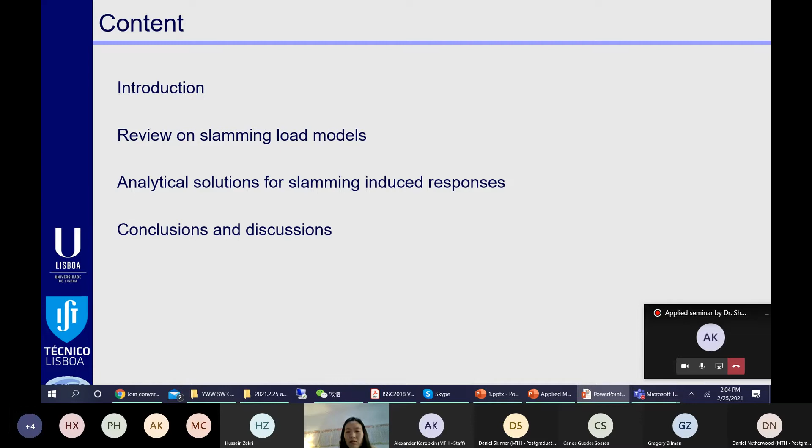The wave impact caused by slamming can be roughly divided into 4 types. This is the bottom slamming—it happens when the ship emerges and re-enters the water surface. This is the bow flare slamming—it occurs due to high relative speed of the bow flare to the water surface.

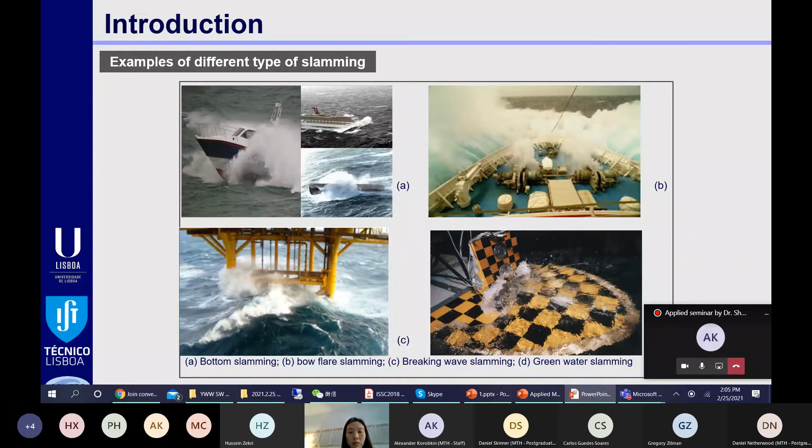This is the breaking wave impact for offshore structures. The breaking wave impact happens also for ships, and it is generated by the superposition of the incident waves and bound wave hitting the bow of a flat ship, even for very small ship motions. The last is green water impact. So in our study, we have focused on the bottom slamming and bow flare slamming.

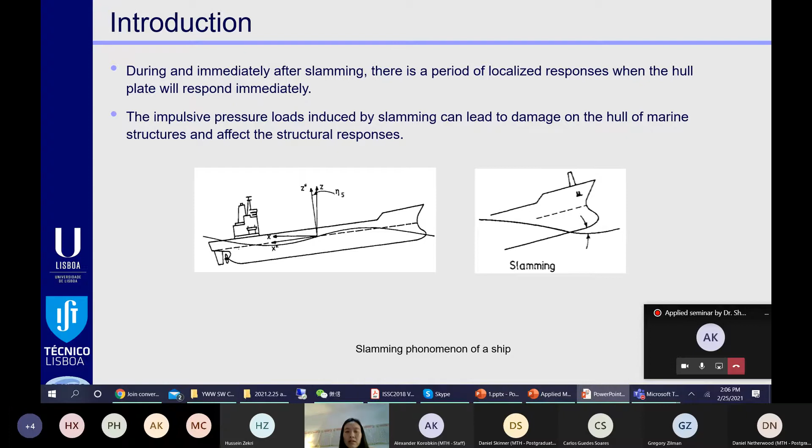When a ship is advancing in rough seas, the ship hull may impact with the wave surface due to very large vertical motions. During and immediately after the slamming, there is a period of localized responses when the hull plate will respond immediately. The impulsive pressure load induced by slamming can lead to damage on the hull of marine structures and affect the structure response globally.

Slamming also introduces whipping response. The whipping response refers to the hull girder vibration due to slamming. Local slamming is also likely to happen on the wet deck connecting two hulls of a catamaran. Looking at these two pictures, we can see we have different geometries on this connecting plate—this is a wedge shape plate, and here is a very flat plate with very high...

Shan, excuse me, on your slide, in the right bottom corner, there is the—yeah, just close it, click on the cross. Yes, perfect, thank you very much.

Thank you. So look at these two pictures—we can see this is the wedge type geometry, and this is a relatively flat plate. For the flat plate, when the ship is advancing at very high speed, the impact between the plate and the wave will induce very high slamming pressure, which will cause damage owing to even one single impact.

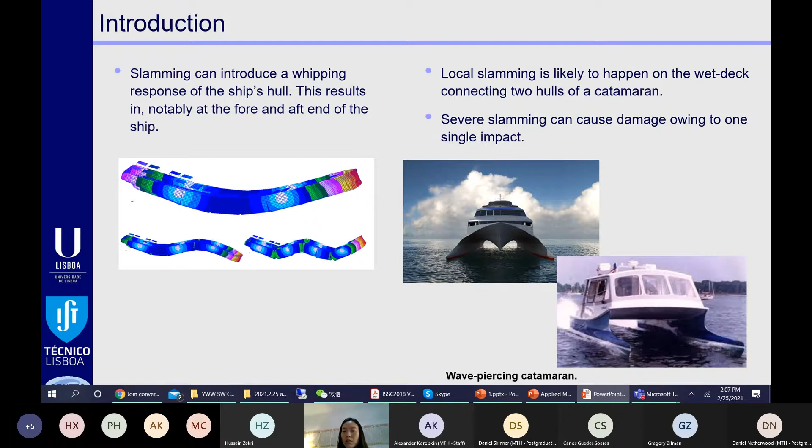The wave load response of a ship in harsh or extreme irregular waves and the structural safety is a special reason of concern, since ships operate in unknown, severe, and high-risk environments. Marine accidents due to structural failure may occur at sea.

There are some examples. The first example is the 275 meters long container ship, which was caught in stormy waves. This example is for a 5-year-old container ship, which was broken into 2 segments in very severe weather.

There are also some examples of local ship damage due to wave impact. For example, here is the Estonia ferry disaster. The disaster killed more than 800 people because the bow of the ship broke and the ship sank.

Here is an example for FPSO—it is a floating production, storage, and offloading system. In the picture, we can see there is a very big permanent deformation due to repeatedly water impact on this location.

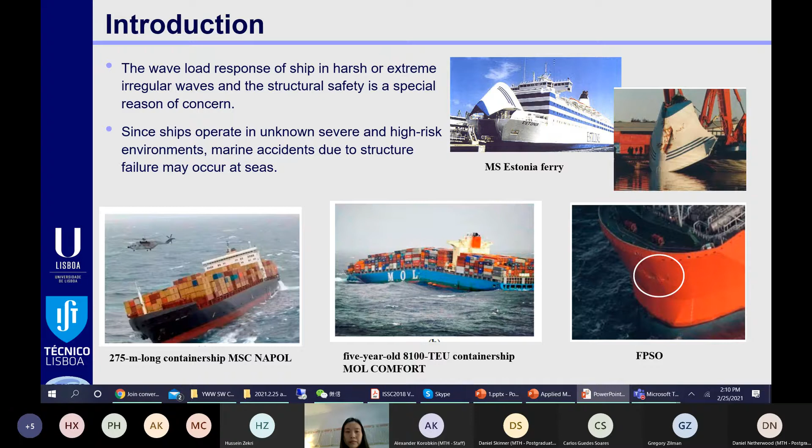The common hydroelastic models for ship slamming commonly involve 3 models: the structure model of the ship, a hydrodynamic model of the fluid, and a coupling method to enable the interaction between fluid and structure. The structure model is usually represented by a beam model or 3-dimensional finite element model, while for the coupling method, the modal approach is the most common method.

For some cases, in-house developed or open source coupling interfaces have been developed to couple CFD solvers with 3-dimensional finite element models. For the hydrodynamic model of the fluid, there are 2 approaches: the potential flow-based solution and CFD tools. For the potential flow-based solution, there are usually 2 approaches: the strip theory approach or the boundary element method. Theoretically, the coupled CFD solver with a 3-dimensional finite element model can simulate any situation of the fluid and can study most of the physical aspects of ship slamming.

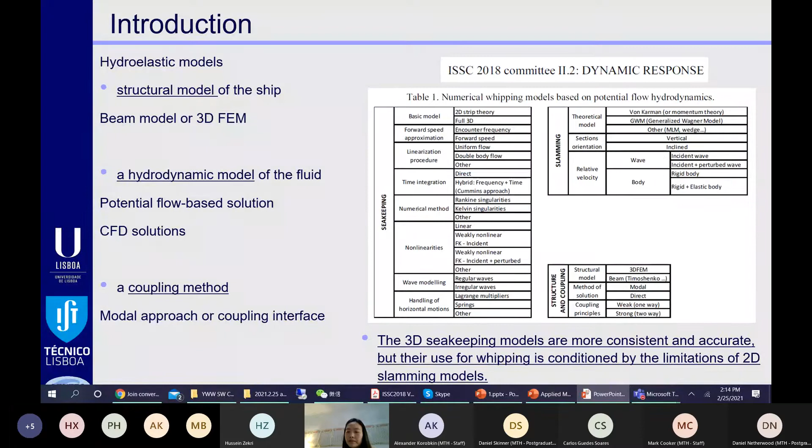Next, I would like to review the slamming analytical models and introduce their applications in my study. For this topic, a two-dimensional wedge impacting with water was initially studied by Von Karman in 1929. This model neglected the wave surface elevation on this part. Later, Wagner developed this model by taking this into consideration.

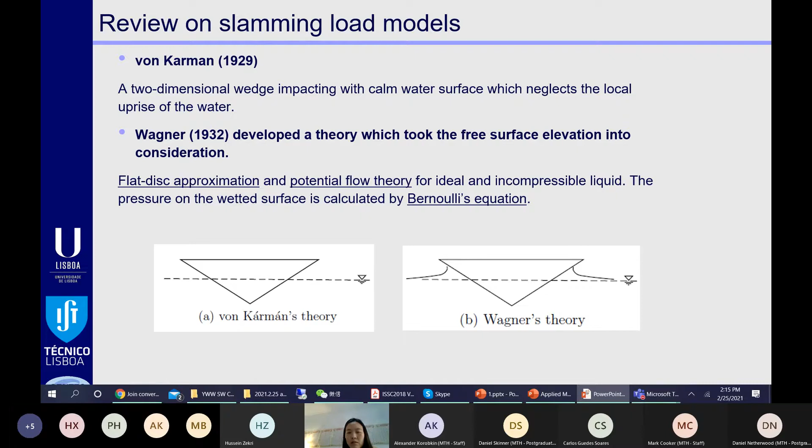Both models are based on the flat disk approximation and the potential flow theory for ideal and incompressible liquid. The pressure on the wetted surface is calculated using Bernoulli's equation. After the initial studies, a lot of work has been done by other researchers to make improvements.

In 2004, Professor Korobkin studied these models based on potential flow theory. The hydrodynamic pressure in the flow domain is given by the Cauchy-Lagrange integral. Here are the expressions for the hydrodynamic pressure and the velocity potential. H means the penetration depth of the body into water, while F means the body shape.

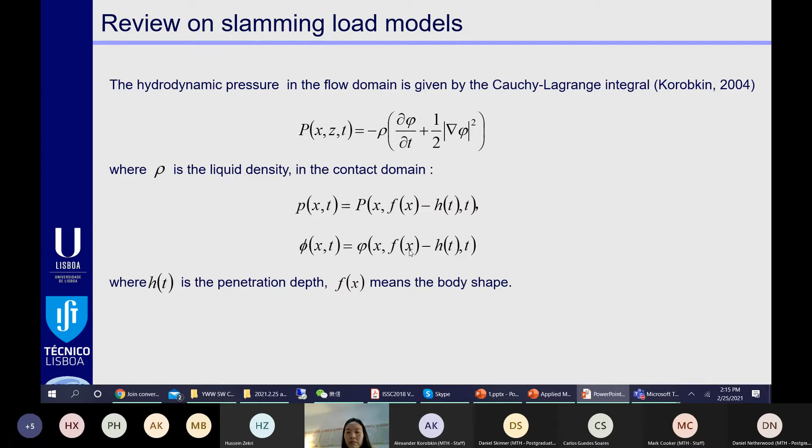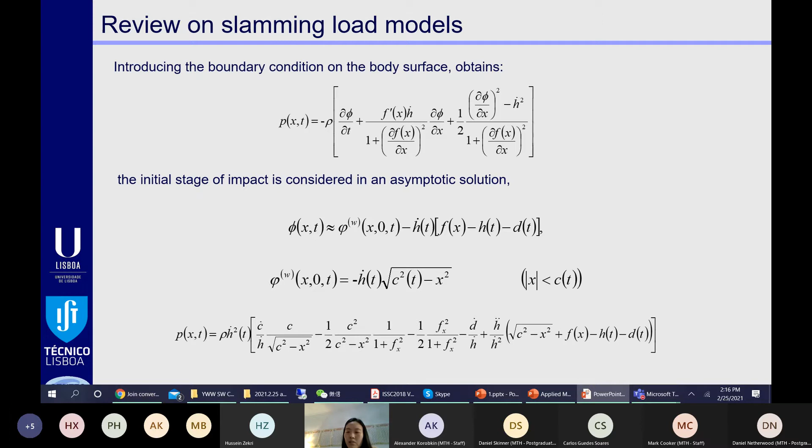If we introduce the boundary condition on the body surface, we get this expression for the pressure. Considering only the initial stage of the impact, we get an asymptotic solution for the velocity potential. By introducing this expression into the pressure formula, we can get this format of the pressure distribution, depending on space and time. In this equation, the function d was introduced to include the effect of the splash height of the water. With different assumptions of the function, we get different analytical models.

To improve the predictions, the higher order terms in the Bernoulli equation were taken into account within the generalized Wagner model and Logvinovich models. The results of Professor Korobkin showed that the Logvinovich model corresponds better to the experimental data than the generalized Wagner model. These models can be extended to different shapes of structures and also to three-dimensional bodies. These models, along with the original Wagner model, have been applied in one study to examine the local response of a sample structure due to water impact.

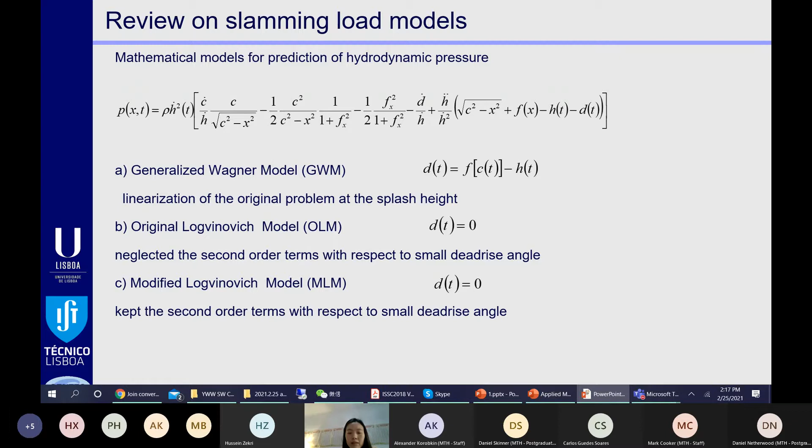Next, we're going to see 5 examples of the application. The first example is the hydroelastic response of the wet deck slamming.

The wet deck means the structure part connecting two hulls of a catamaran. Because of the flat geometry, which we have seen in the picture at the beginning of the presentation, very high slamming pressure can be generated.

For the part of the wet deck between two transverse stiffeners, an Euler beam with length L corresponding to the distance between the two stiffeners can be a good approximation. The hydrodynamic pressure on the bottom is estimated using the Wagner model. The deflections of the plate at each time step were considered in the slamming load model, which means this solution is a fully coupled hydroelastic model.

The second one is the dynamic response of an elastic wedge subjected to slamming load. We also use a beam model, but here we applied the rigid body assumption when predicting the slamming load, and the modified Logvinovich model was applied. This case considers the water impact between the front part of a slender ship with a width much smaller than its length.

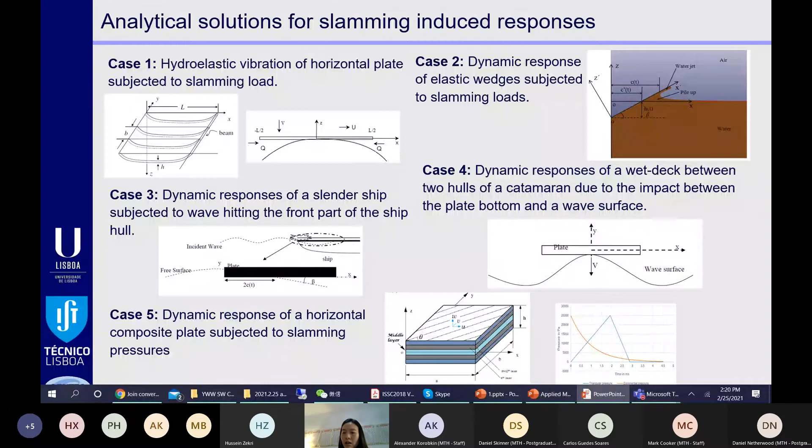Next, we are going to review this case briefly. In the first case, an asymptotic solution proposed by Professor Faltinsen was applied. We consider the speed of the ship U and also the compression force acting on the plate due to the connecting members on the hull.

By considering these 2 parameters, we have this equation of motion for the hydroelastic analysis of the beam, where EI is the bending stiffness per unit length, and Q is the longitudinal compression force per unit width. M is the mass of the plate per unit square.

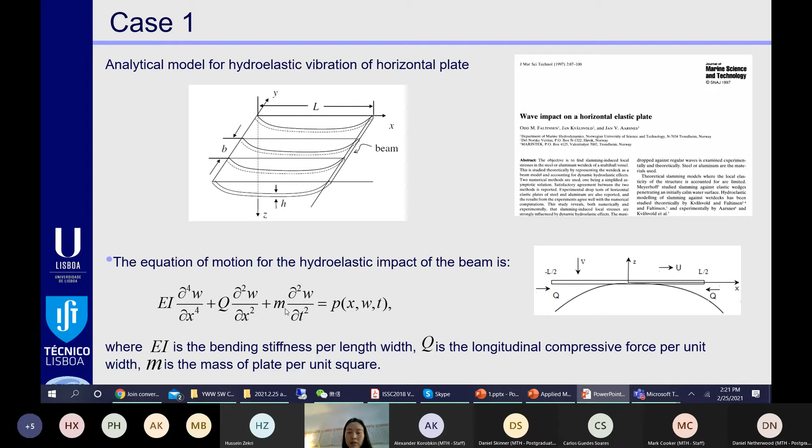The elastic deflection is first expressed in terms of the normal modes using this equation, where AN means the principal coordinates and psi are the eigenfunctions. By considering the symmetric beam, we have this type as the solution of the eigenfunctions.

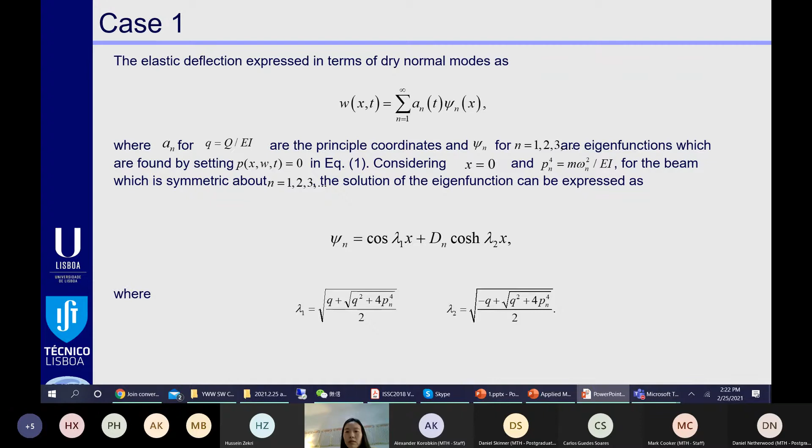Considering the speed of the ship, we get this type of velocity potential on the body, which was proposed by Professor Faltinsen, where phi3 means the velocity potential due to forced heave with unit velocity, given by this formulation, where L is the length of the beam.

Regarding the hydrodynamic pressure P, we considered the effect from the speed of the ship. Then, if we introduce the velocity potential, we can get this type of hydrodynamic pressure.

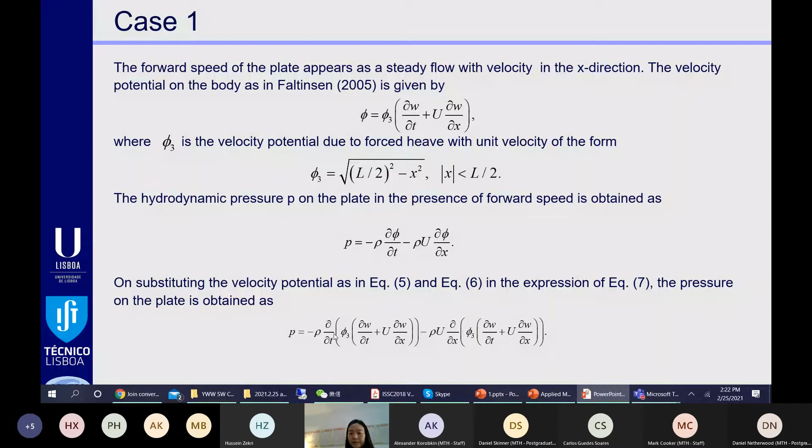Substituting the previous equation into the equation of motion for the beam, we can get this form for the equation of motion. Then, by multiplying the eigenfunctions on both sides and integrating over the wetted surface of the beam, we can get this equation.

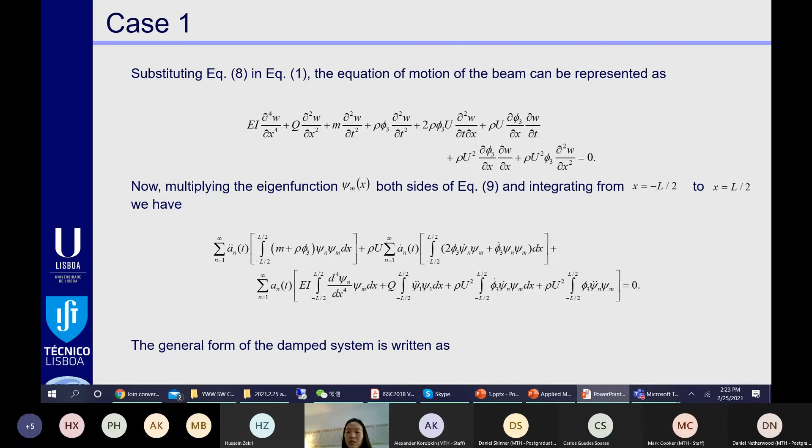The general form of the damped system is written as this, where m is the inertial coefficient, c is the damping coefficient, and k is the stiffness coefficient. These three values of the matrix can be calculated using these equations. If we know the properties, dimensions, and boundary conditions of the system, we can get all the results.

The experimental study carried out by Faltinsen showed that the results associated with the first mode shape dominated the response, so only the first mode was considered in our study.

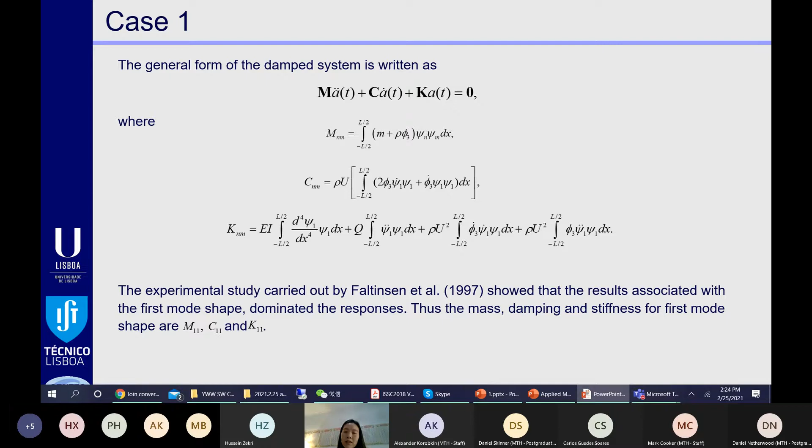The table lists the plate properties and the parameters that we used in the calculation.

To validate the model, we use a fully coupled ALE and finite element method, implemented in the commercial software LS-DYNA. This is a fully coupled hydroelastic analysis, and we compared the predictions of the slamming pressure and also the deflections at the middle point of the beam.

These two figures compare the pressures at two locations of the beam using the asymptotic analytical solution and the software LS-DYNA. We can see that for this case, with a 2.5 meters per second entry velocity, the commercial software provides very high initial peaks. However, we have very low initial values in the analytical prediction.

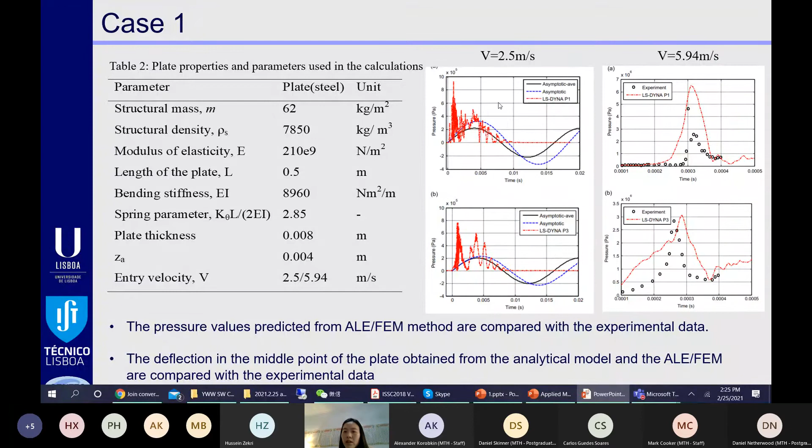Then for another case with a higher entry velocity, LS-DYNA provides better agreement with the experiments. For the same case, we compared the deflections at the middle point, and we can see that even though there are very big differences between the pressure predictions, we get better agreement on the deflection in the first half period.

This result is consistent with the conclusions presented by Dr. Sime Malenica: the peak value of the pressure doesn't affect the deflections on the structure much.

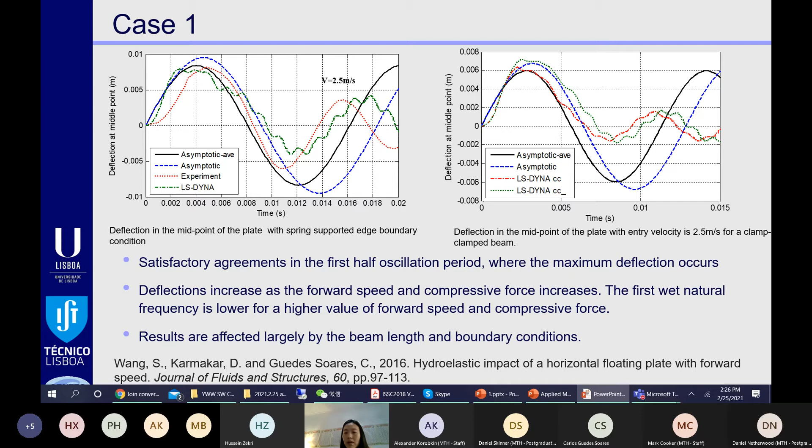For another case with a different boundary condition, the analytical solution also provides satisfactory agreement compared to the fully coupled analysis. There are more results presented in the paper, and results are affected largely by the beam dimensions and the boundary conditions.

The second case is about the impact on the elastic wedge. We use a similar approach, the Euler beam for the wedge and the modal approach to get the deflections on the structure, but we didn't consider the structure deflection effects on the slamming pressure.

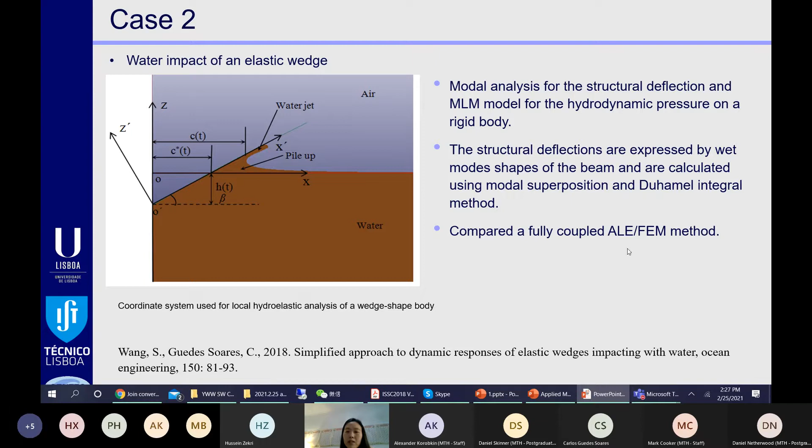So this is a dynamic analysis, different from the previous hydroelastic analysis. Similarly, we compared the results of the deflection at the middle point with the fully coupled analysis.

Assuming the rotational inertia is small, the governing equation of motion for the beam is given by this equation. Similarly, we use the normal mode to present the deflection first, and then we can get a differential equation for determining the principal coordinate An.

In this equation, the right side is the generalized force, where small p is the hydrodynamic pressure, which depends on space and time. We use the modified Logvinovich model for the pressure.

By using the Duhamel integration method, we can derive the response, where An0 is the initial deflection, which is zero, and this is the initial velocity of the plate. We consider this to be the relative velocity between the plate and the wave.

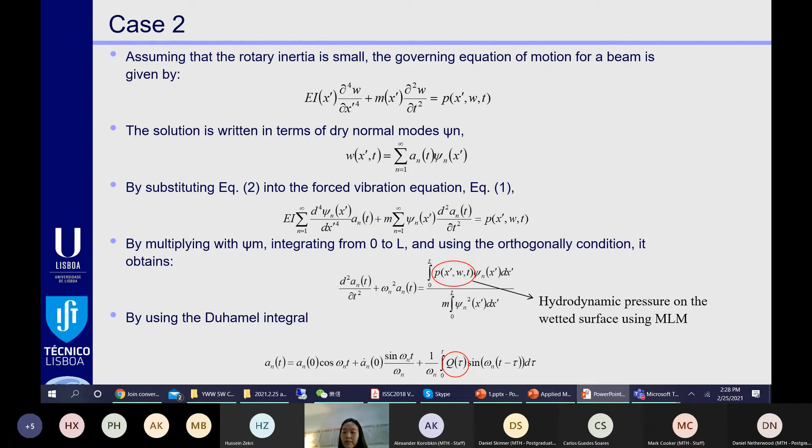To validate the case and identify the hydroelastic effects on the model, we compared the deflections for different cases with different dead rise velocity and plate thickness.

As mentioned before, the analytical model is a dynamic analysis, while the fully coupled ALE and finite element solution is a hydroelastic analysis. So to compare the results predicted from these two solutions, we can investigate the hydroelasticity.

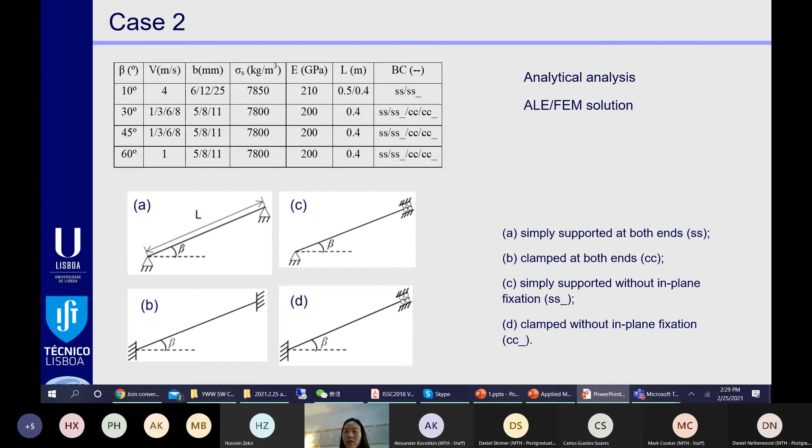Here are the results for the case with 10 degrees dead rise and different plate thicknesses. We can see that for these two cases, when we have low or small plate thickness, the analytical results are very different from the fully coupled analysis, while when we have a large plate thickness, the agreement is much better.

In this study, we applied a ratio RF to represent the hydroelasticity effect. RF means the ratio of the loading period to the dry structure natural period. A value less than 2 indicates that hydroelasticity is important for the case, but if this value is higher than 2, we can consider the hydroelastic effect small.

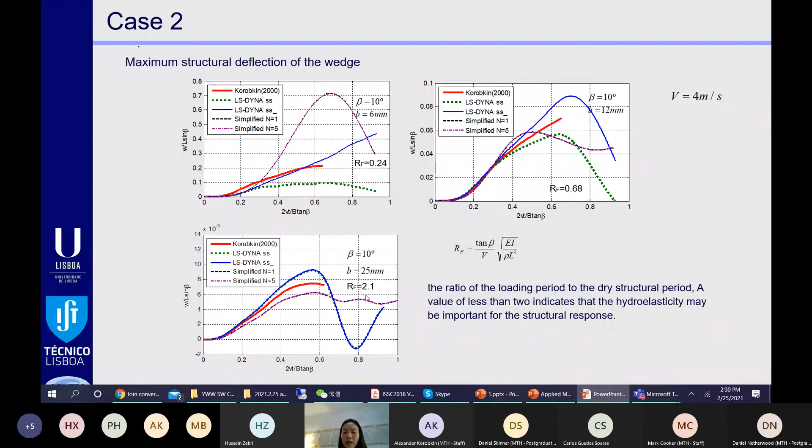Then we can apply the analytical model. This statement was also proposed by Professor Faltinsen, and our results are consistent with this statement, because for these two cases we have very small RF, and here we have a value higher than 2.

In this slide, there are results for the case with larger dead rise, 30 degrees and 45 degrees, when the entry velocity is smaller, 1 meter per second. For these cases, we can see the analytical models provide satisfactory results in the time history of the response at the middle point, compared with the fully coupled ALE and finite element analysis and also a boundary element solution.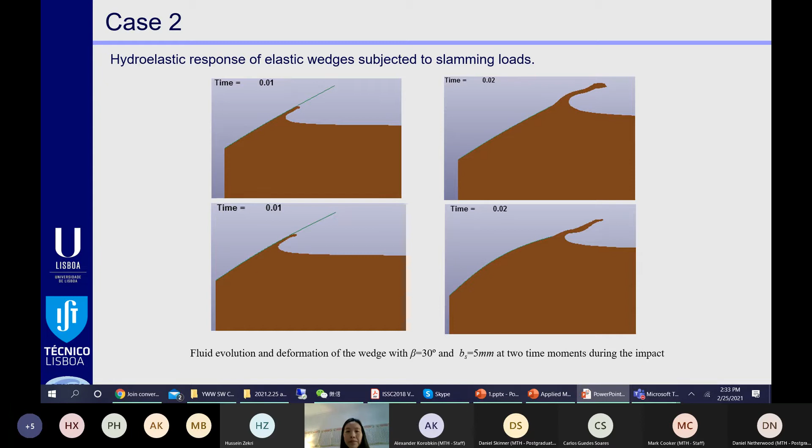To see the differences between the applications of different slamming models, we also applied the generalized Wagner model and the original Wagner model in our simplified analysis, and we compared the deflections from these different slamming models. We can see that with different slamming models, we predict different structural responses. It means that the accuracy of the prediction on structural response is affected by the accuracy of the slamming load.

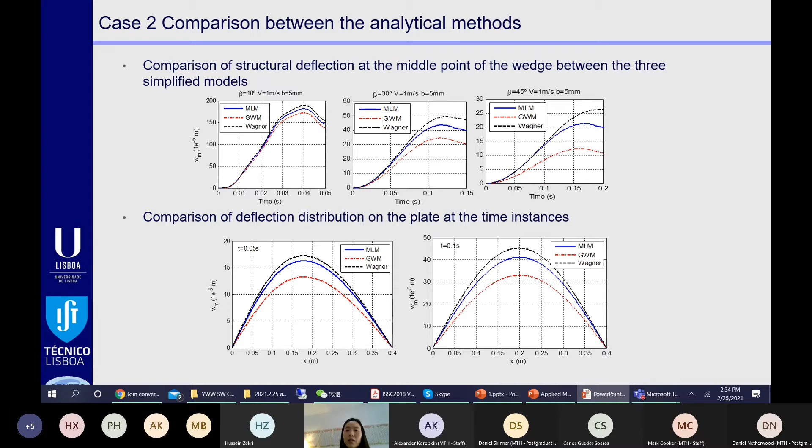The present study indicates that the simplified method gives satisfactory predictions of the deflection on the elastic wedge when the hydroelastic effect is not significant, and it is validated for the cases with larger dead rise, low entry velocity, and high plate thickness. It is also interesting to see the differences between the simplified model and the fully coupled analysis.

So for the simplified method, it is easily derived and solved based on potential flow. The coupled ALE and finite element method is very sensitive to meshes and time step. The numerical uncertainty is due to the discretization, and the experience of the users are also difficult to be identified. But this solver can simulate the compressible and viscous flow. The simplified method can be applied for the wedge with arbitrary dead rise angle and constant velocity.

And of course, it is possible to extend the model to more geometries with different boundary conditions. But the numerical analysis can be used for an arbitrary geometry with arbitrary boundary condition and velocities. However, from the CPU point of view, the difference is very high.

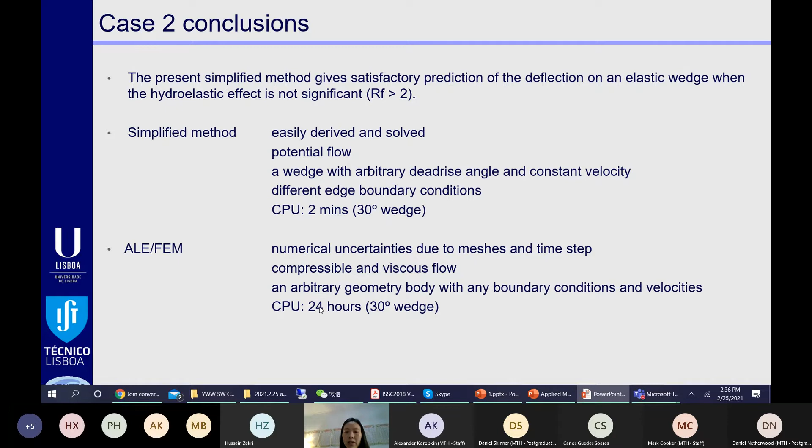The next case is the impacting between a slender ship with a very big wave. And the solution is very similar to the previous one, so I will review the case very fast.

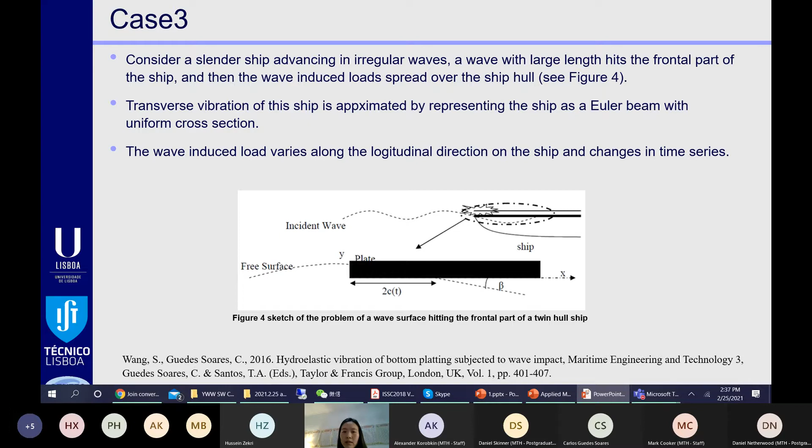Here it is the approximated model for the problem. We consider the ship is an Euler beam, and the beta is the relative angle between the wave surface with the beam. The V is the relative vertical velocity between the structure with the water.

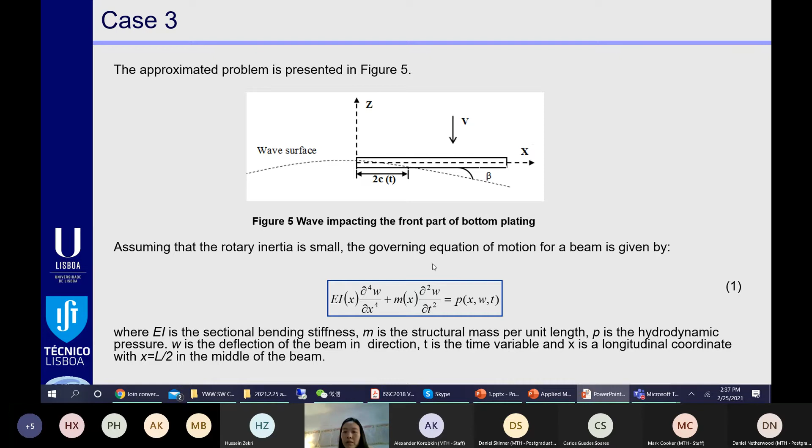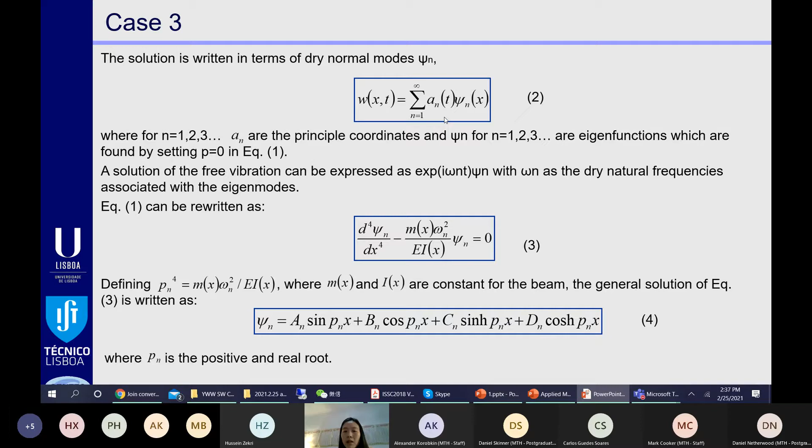So we apply also the Euler beam equation of motion, and then we express the deflections using the normal modes. And finally, we get this equation for determining the principal coordinate. In this equation, this P is also the hydrodynamic pressure on the rigid body.

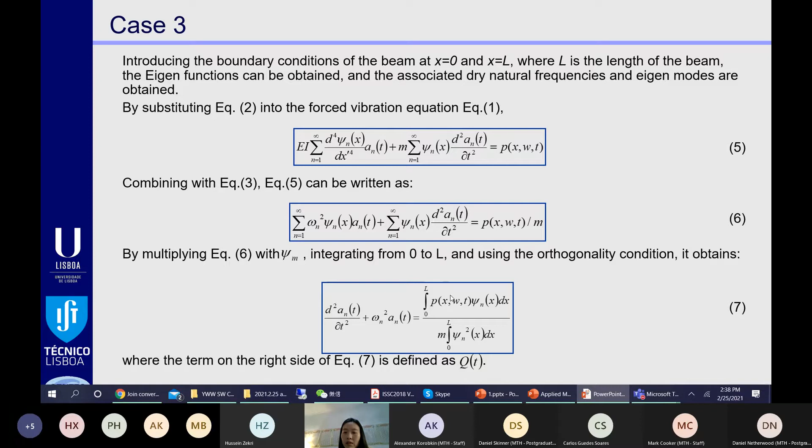It is still the rigid assumption model. We use the Bernoulli equation to derive the hydrodynamic pressure.

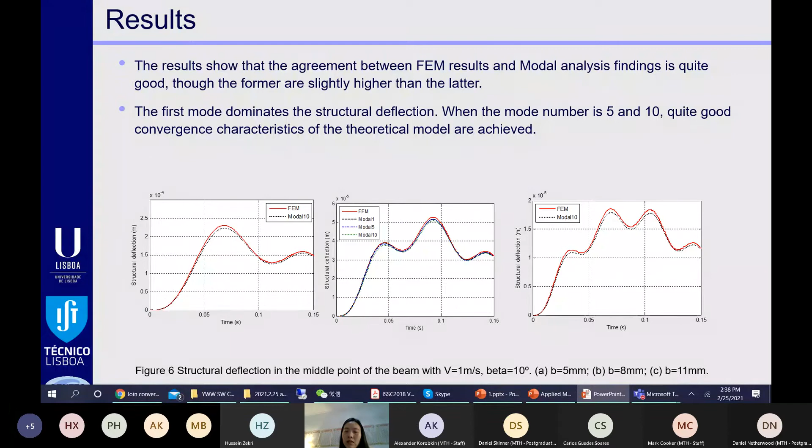The analysis was validated by using the direct finite element analysis in ANSYS, and we consider different number of the normal modes in the analysis. We can see very good agreement was achieved.

There are also different results for the maximum deflections for the beam if we consider different relative angle between the wave with the cylinder shape and also different relative velocities.

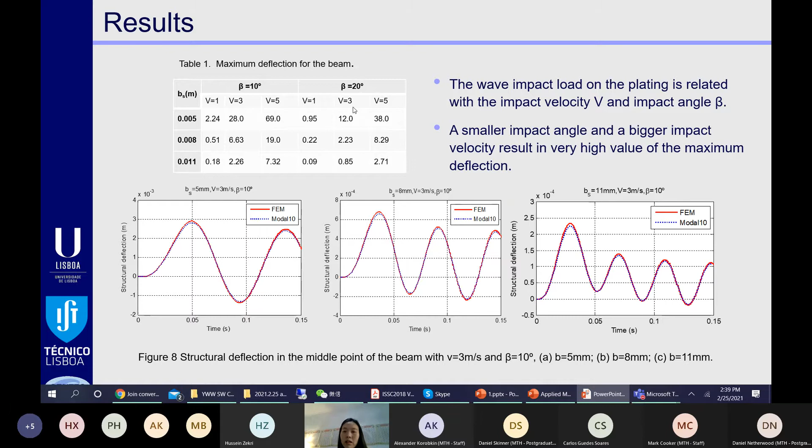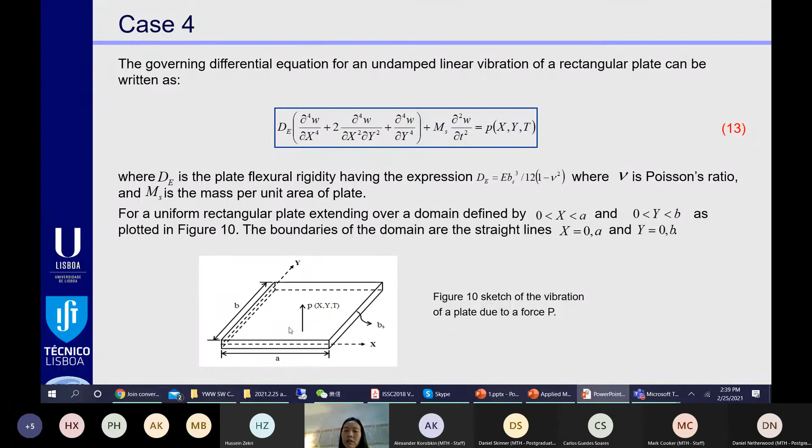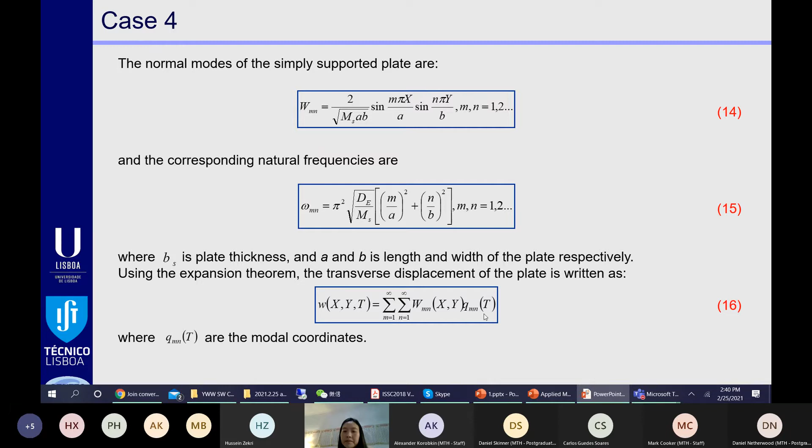The normal modes of the simply supported plate can be written as equation 14, where we have the following natural frequencies. Then by using the expansion theorem, we can express the transverse displacement on the plate by equation 16, where Q is the modal coordinates.

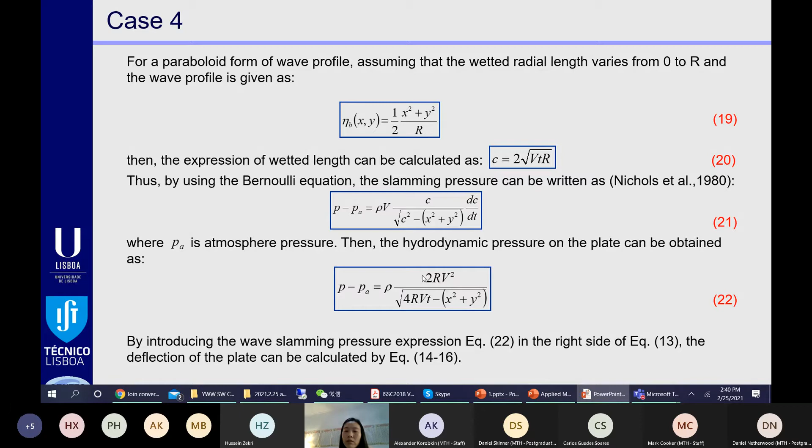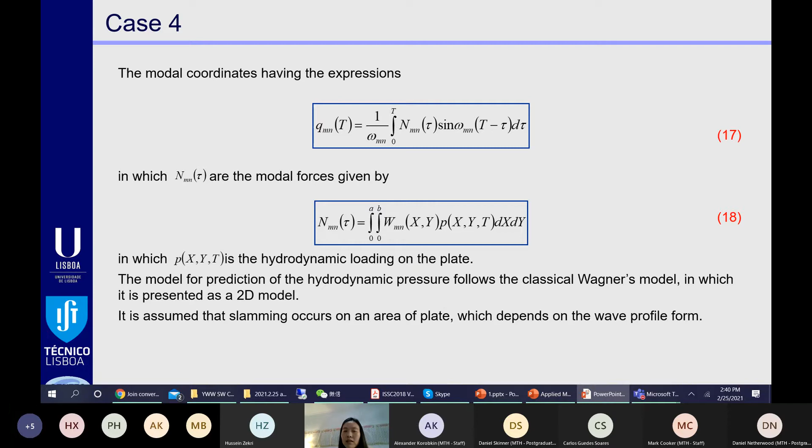Then we can get a wetted length on the plate. By using the linear term in the Bernoulli equation, we can derive the hydrodynamic pressure as given by equation 22. So we apply this equation in equation 18 to get the modal force, and then we get the modal coordinates. Then we can finally generate the structure deflection on the plate.

The results were also validated by using the direct finite element dynamic analysis, which have good agreement. And the first natural mode dominates in the response.

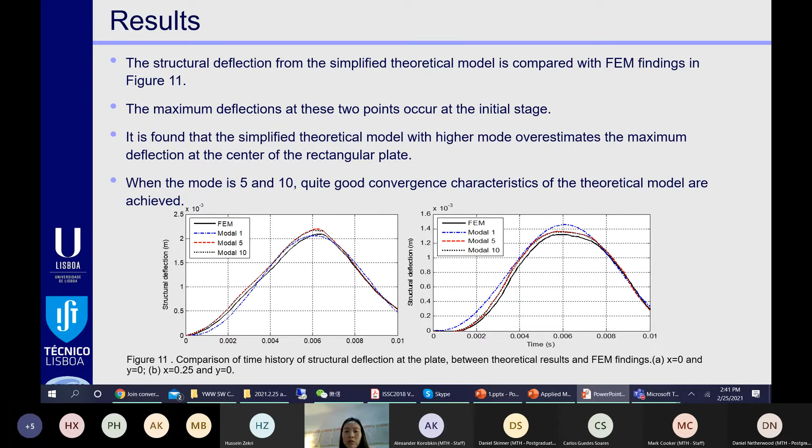Recently, we have been studying the dynamic response of composite plates subjected to slamming pressure, because composite material is becoming more and more attractive as it is lighter and more flexible. The hydroelastic effect is more important for this type of analysis.

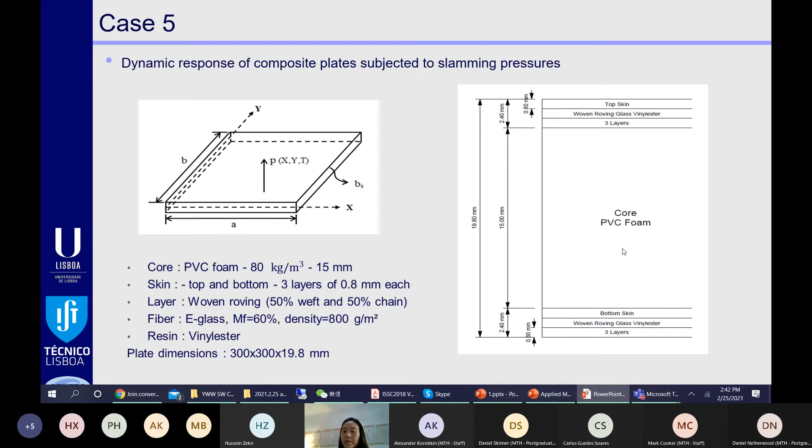This is a cross-section of a sandwich plate, and for different layers there are different material properties. In our study, we consider 3 layers: the skin layer and the core with PVC foam.

This table shows the material properties for the skin layer, while this one shows the properties for the core. With these two tables, we can derive an equivalent isotropic plate by using the rules from BV, where we have the following material properties.

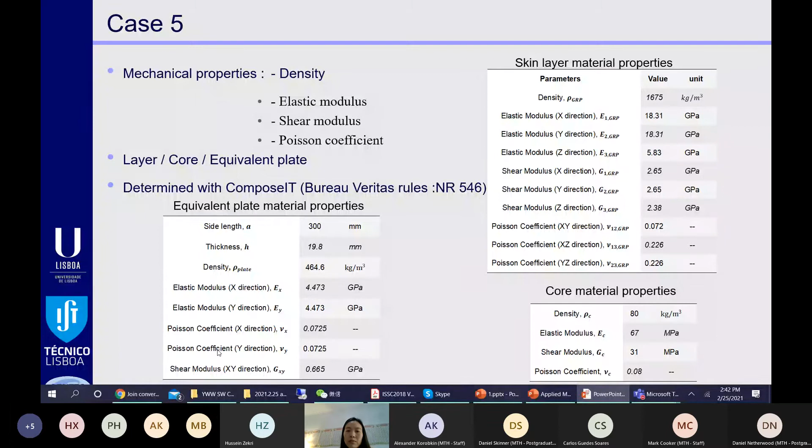If we use these material properties, we can get the response of the plate using the isotropic plate equation of motion, which is given here.

Considering the simply supported boundary condition, we have these conditions, where we have the eigenvalues. The equation is solved by considering the particular solution and the homogeneous solution, where the hydrodynamic pressure on the plate was proposed by two different slamming impulses.

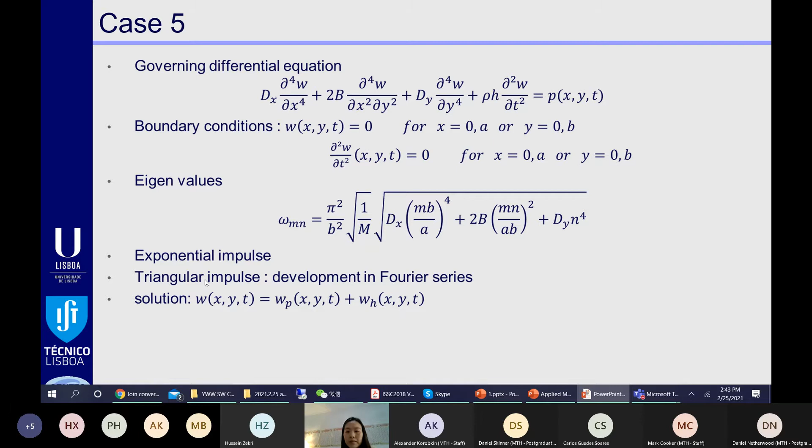One is exponential, the other is triangle type. The two proposed slamming pressures are shown in this figure.

In this study, we would like to study the effect of three parameters: Pm, which is the peak value of the pressure, and Td1, Td2, which are the loading periods of the pressure, on the slamming-induced response. So we applied different values for different cases.

With the three values, we have two expressions for the exponential and triangle slamming impulses. By applying Navier's method, this load can be expressed in the form of a double trigonometric series in the following two equations.

By applying these two equations in the previous equation of motion, we can get the structure deflections at each time step and at each location of the plate.

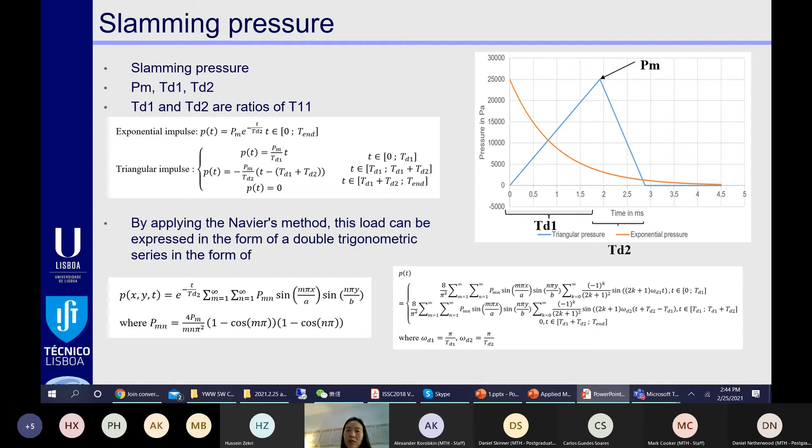The T11 means the first natural period of the plate itself. In the numerical analysis, we applied the same material properties, the same boundary condition, and the dimensions. Also, we applied exactly the same exponential impulse.

We can see that the agreement is very good, because the deviation is only around 1.69%. Here is the comparison for the case with a triangle slamming impulse. A little bit higher deviation was observed, but it is still considered satisfactory.

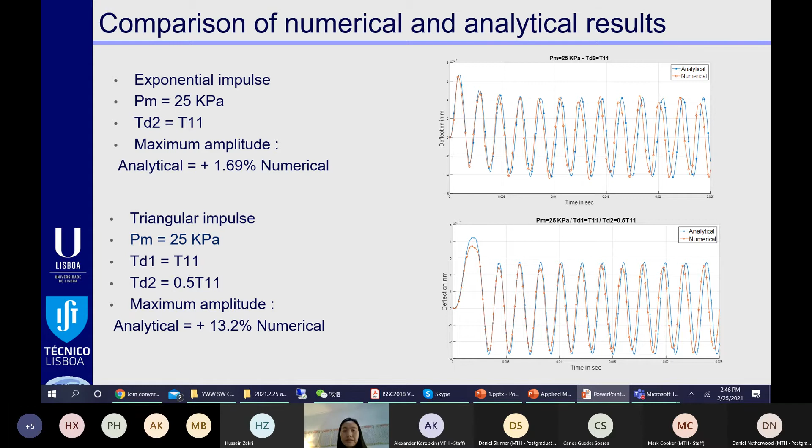Then we studied the influence of the different parameters. Here are examples of the results for TD1. For the four cases, we apply the same peak value on the pressure, 25 kPa.

For each sub-figure, we use the same TD2 but with different TD1. There are some interesting results.

For example, we can see that for all the cases, if we use TD1 equal to T11 and double T11, the amplitudes are equal.

When TD1 is 1/2 of the first dry natural period of the plate, the peak oscillation amplitude is always high. Then when TD1 equals T11 and double T11, for these two cases, we don't have the free vibration phase.

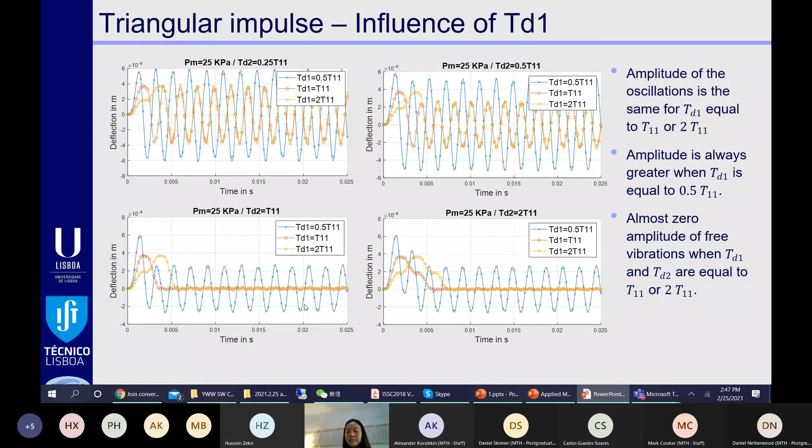Here is one example for the study on influence of TD2. For the three cases, we applied the same amplitude and pressure and same TD1. We can see that for each case, TD2 has no effect on the maximum amplitude; they are always the same. For these two cases, when TD1 equals T11 and double T11, the peak values are the same. But if TD1 is 1/2 of T11, this value is higher compared with these two.

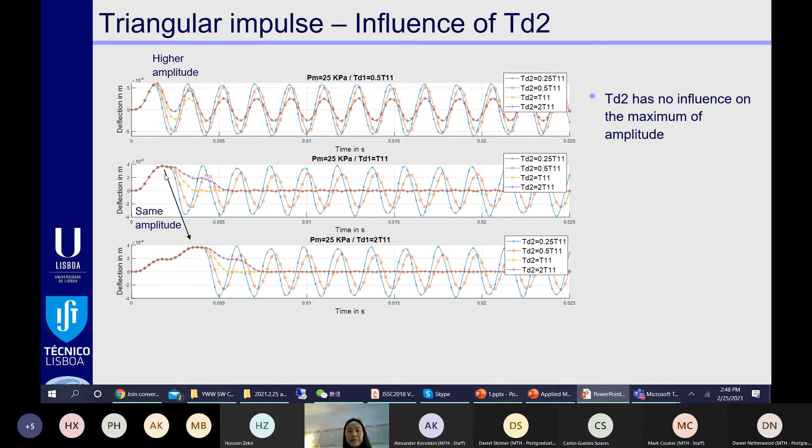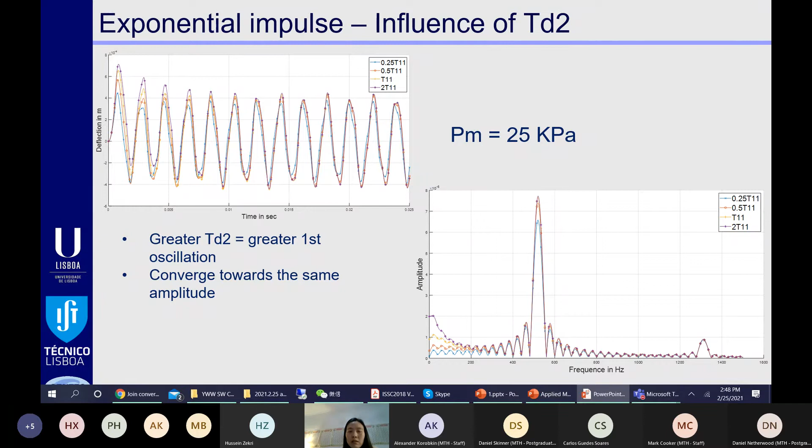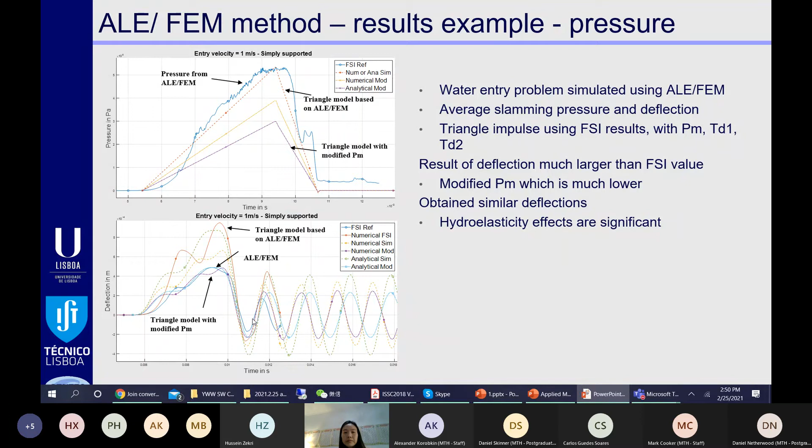In this study, we proposed two slamming pressure impulses in the analytical model for solving the same problem. The model can be easily adapted for other materials and other pressure distributions. It allows us to highlight the influence of different parameters in the analytical model. By comparing with the fully coupled analysis, we can see that the triangle slamming impulse is suitable for modeling the pressure distribution during the water impact of the composite plate. This comparison also demonstrates the high hydroelastic effects on the case.

So this is what I want to present today. To conclude my presentation, I would like to say that the analytical models are very useful and robust for some practical cases if they can be approximated properly. Thank you very much.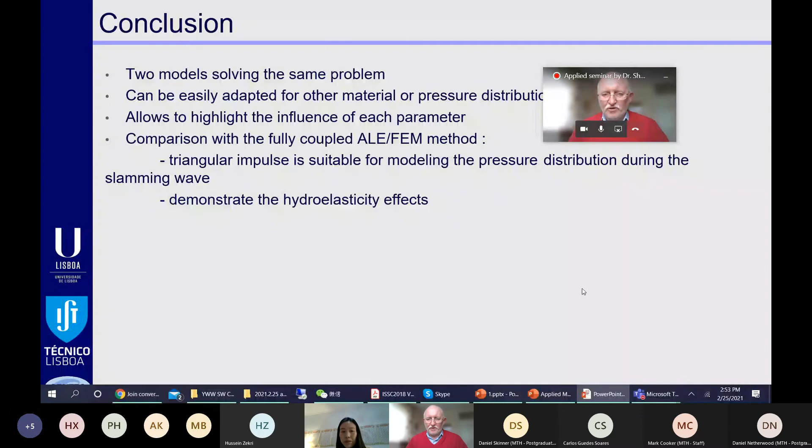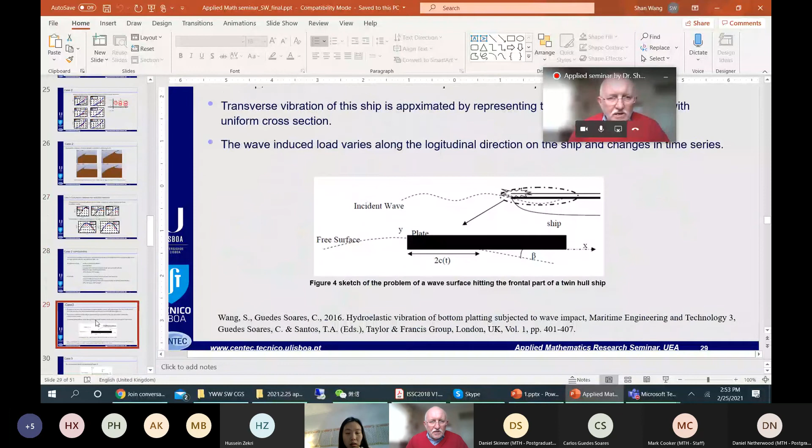While we wait for questions from others, may I ask you to show case 3 and normal mode? Okay. Full mode or not? Normal modes, formula for normal modes, case 3. Okay. Is it case 3?

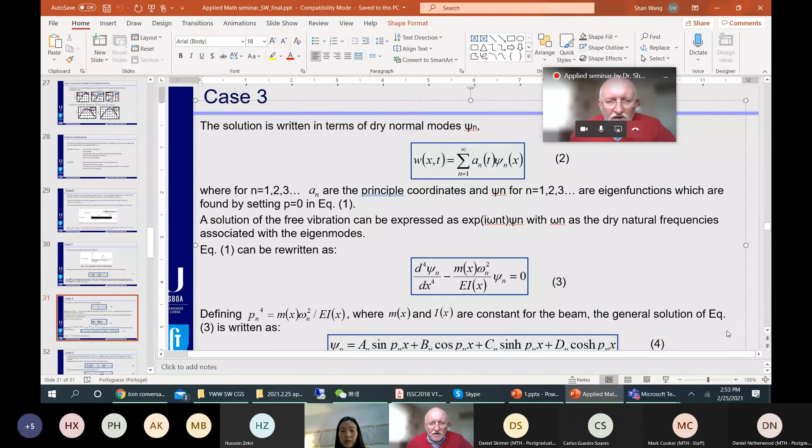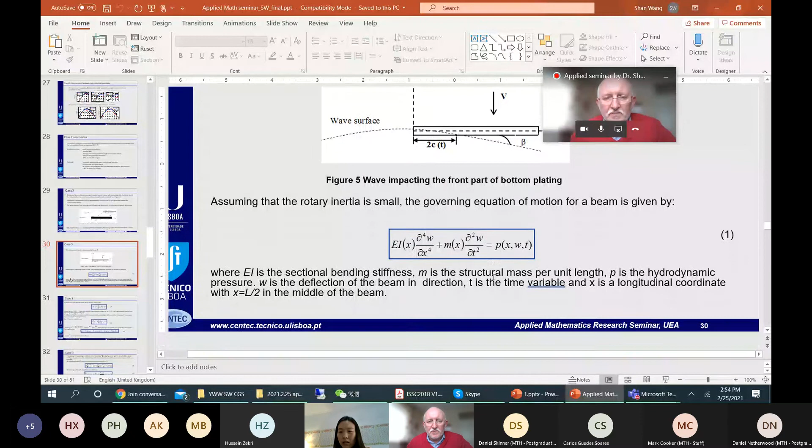Here? Yeah, okay, so equation 3. Can you see equation 3? In equation 3, mass m depends on x. Rigidity -- you mean here? No. Can you hear me? Yes. Equation 3. Not 1, equation, yes. Just stay on this slide.

Do not move it. Okay. And then in equation 3, m of x, mass depends on x. Rigidity depends on x, right? Yes, in this formula. So how did you manage to get equation 4?

For this case, I considered the uniform beam, so M and EI are constant. But if we study a real ship, we need to consider the mass distribution and rigidity distribution.

Yes, please. So equation 4 is for m and rigidity, mass and rigidity constant -- is it right? Yes. Okay, where m and I are constant for the beam. Yeah, it's just written above, between 3 and 4. I didn't pay attention to that. Okay.

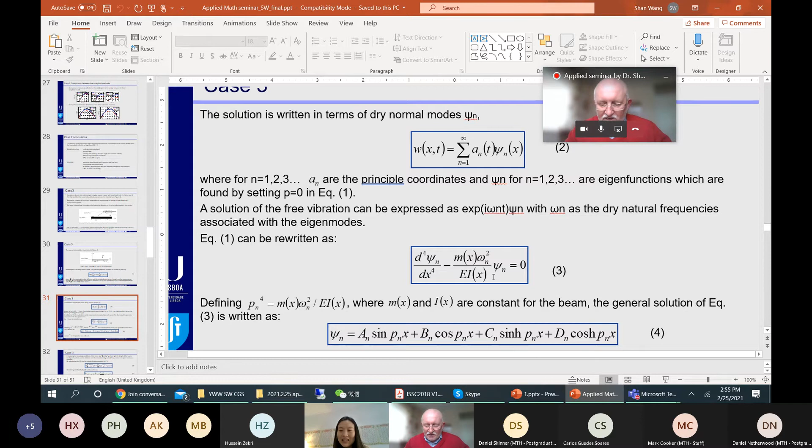And any other questions? Just if not. Yeah, then can you go, please go to the beginning, and there is a slide with ISSC 2018 table.

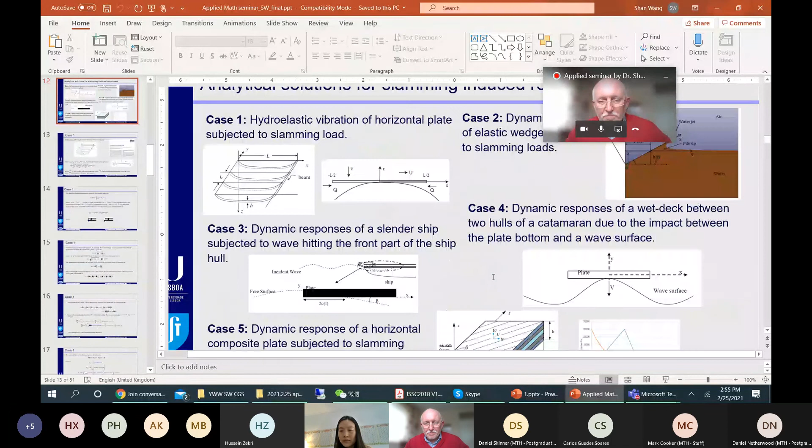Could you explain about this committee, what they are doing, and is it important for engineers or researchers, or is it just a recommendation by this committee? How should we understand such tables from the committee? And what altogether is ISSC? What's that?

ISSC is the International Ship and Offshore Structures Congress. It consists of 16 standard committees, and different committees review the studies of the previous 3 or 4 years in different fields. This one is 2.2, regarding dynamic response of ship structures and offshore structures. So every 3 years, we summarize the previous study and the improvement in different subjects.

I am in this committee now for 2022, and I think Dr. Simon Valencia is also in this committee.

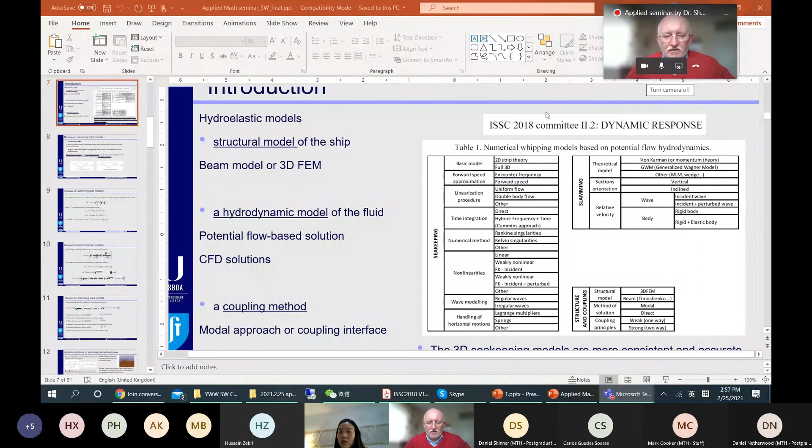And how are the conclusions of this committee important—must they be taken into account by researchers, or are they just recommendations? Could you explain the kind of power that committee has?

I think I kind of summarized the report here. They mentioned that the hydroelastic model involves three models, and the differences between the potential flow method and the CFD method are, how can I say, apparent. For the potential flow theory based method, they are useful for studying springing response and for cases in head waves. But if we use these models in, for example, beam waves, and for structures with very big torsional vibration, the result is not so accurate.

Also, this method is limited by the 2D slamming model, because we always apply the Wagner model, the momentum theory, or the Logvinovich model to get the section force due to slamming. But the section force is only two-dimensional. In the slamming of the ship, in addition to the transverse direction, the fluid is also spreading three-dimensionally, in the longitudinal direction. So in my opinion, the 3D slamming model is also important to improve these models.

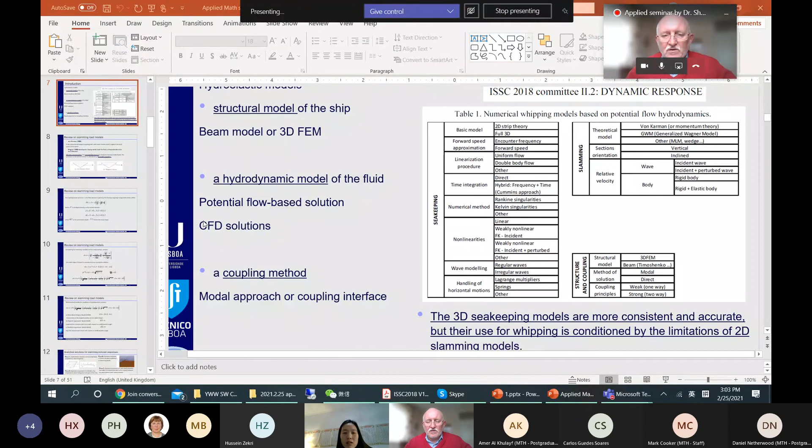Floating solar panels. For the floating structures, they are also using this type of hydroelastic model. But in this case, we cannot use the strip theory, because the strip theory is only valid for slender structures. So for the floating structure, we can only use 3D methods, for example, 3D boundary element solution, if we want to use potential flow.

What's the most important for practice, for industry, to know about slamming? Is it pressures, stresses, or the lifetime of the structure? What's the final kind of result of interest for the industry?

In my opinion, there are a lot of studies regarding slamming, slamming pressure prediction, response analysis, and hydroelastic models. But I think the final objective of this study is to include the nonlinear slamming effect on the design load of the ship. Because when we design a ship, we need to follow some rules, and there are some design loads. For different loads, we have different dimensions or scantlings on the plate. So I think it's very important to find a way to include this effect in the rules of classification societies.